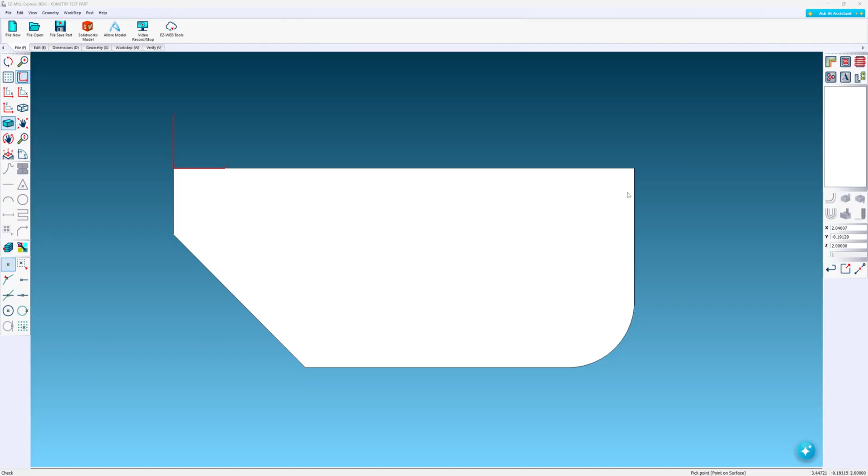This is probably the correct orientation for machining this fillet and the tapered surface here. That is one setup. Then you'd have to close EZ Mill Express and then open a new document and machine the pocket and the countersinks on their separate program. Then you would have to create another setup for countersinking the holes.

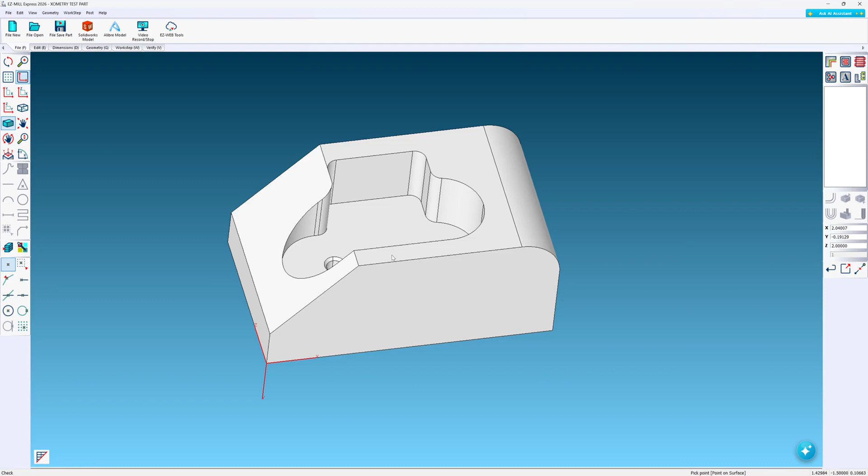So let's stay in this orientation. I could easily move our coordinate system up to the top. I'm going to show you another method. It's called World on Geometry, UCS on Geometry. You can see as I hover my cursor, you have different options. I'm just going to borrow this one for an example.

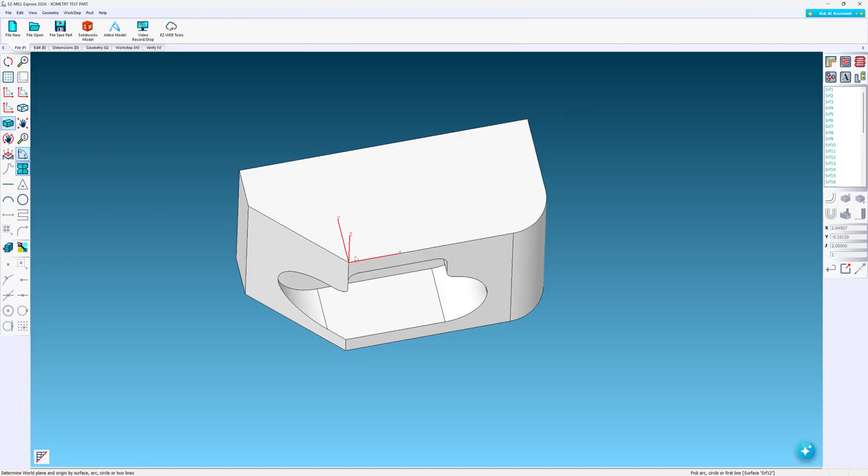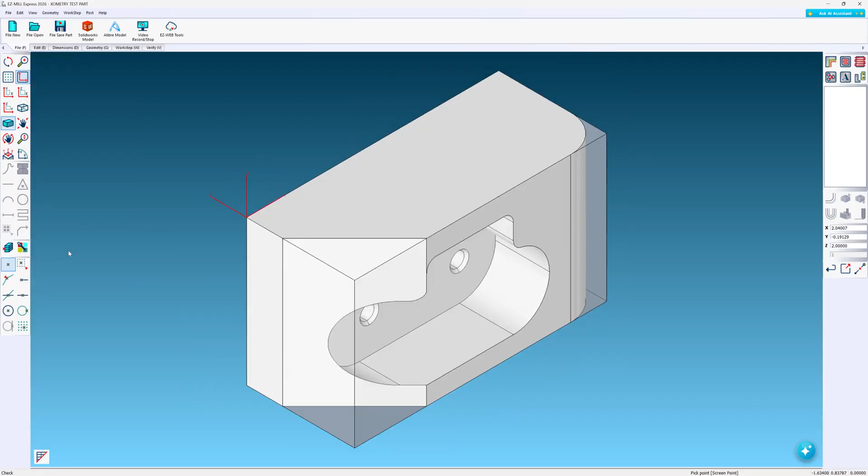Now, if I was pleased with the location, I could just hit original, but I'm going to pick one of the 9 standard locations, top left corner. And we're going to create the stock surface. This is the block size. I'm going to assume that this block has been finished to size. There's our new placement. And here in gray, you can see our stock.

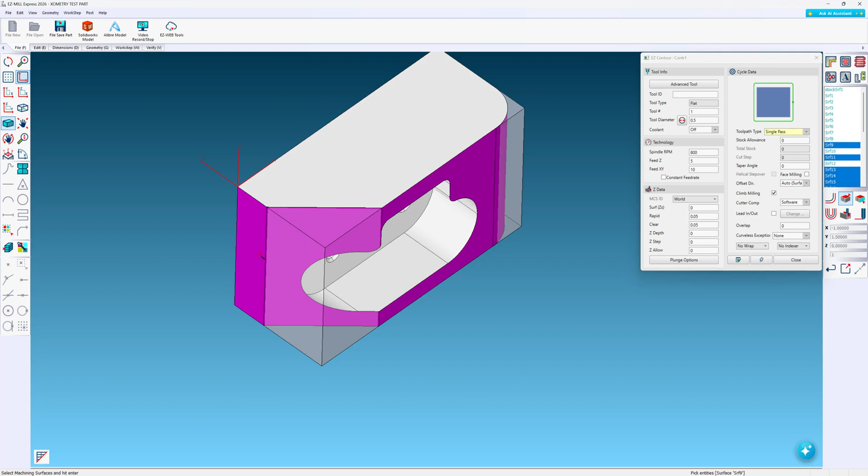We're going to create a contour operation. Smart click is active. I click on one face, it changes all the faces that make up that contour. Now that'd be fine. If the block was oversized, you get a nice cleanup pass. I'm just going to click on the screen to clear my selection. Let's go and hit the shift key. That turns off smart click and I can pick individual faces. I'm going to pick those two there and we'll just verify.

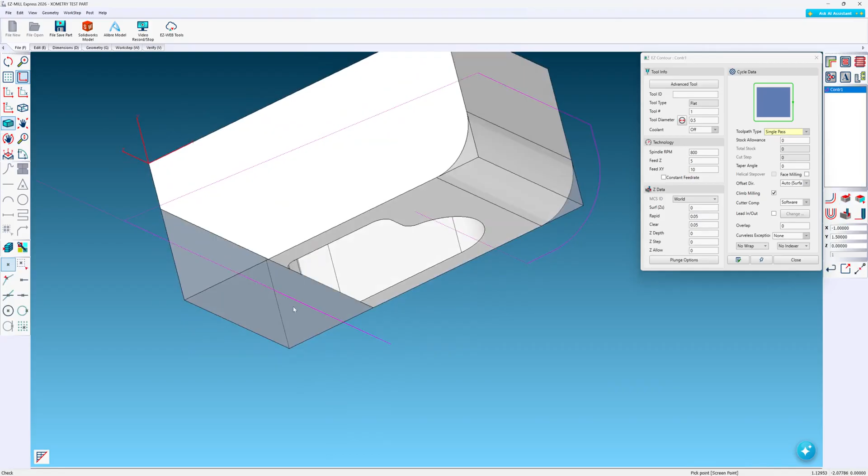So you can see we're getting heavy material here. The tool would leave, let's just demonstrate that. Leaves material. We should be cutting outside and working our way in. So what we'll do there is we'll go to multi-pass. Total stock, I'm going to exaggerate that by 0.7. And a cut step. You can go full depth with your end mill and use a shallow cut step. I'm going to use 50 thousandths.

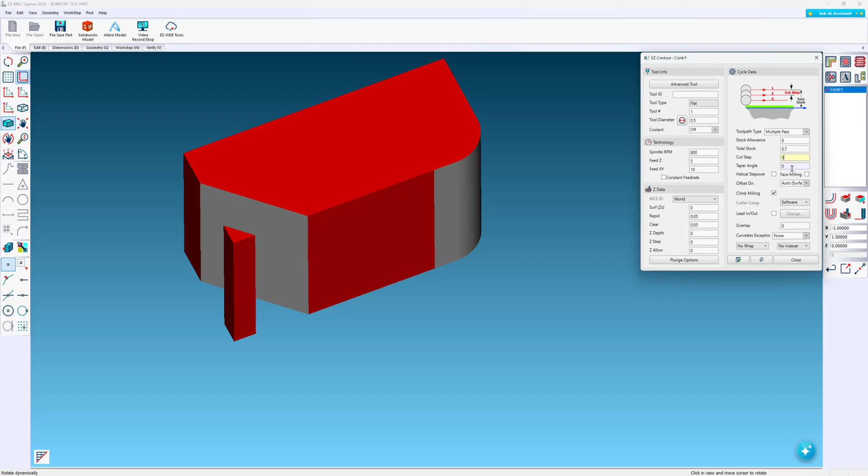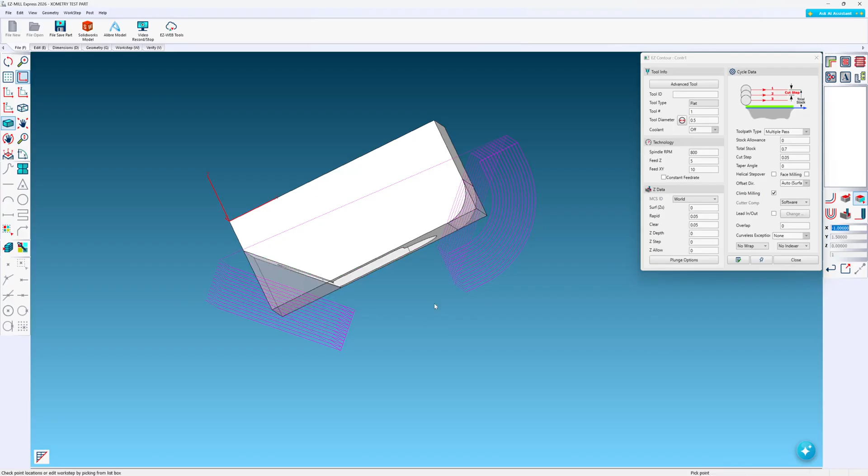Verify that. Now it's not practical. You're going to have a lot of air cutting here. So the way around that, now we created our stock. So I'm just going to include that as a check surface. I'm going to use smart click, turn the shift key. I like to keep it active at all times. And EZCAM trims the tool path.

If you want, you can use helical stepover. So now you're not rapiding out of the part and stepping over to always climb mill or conventional mill. This just zigzags back and forth, cutting up to the wall. Very efficient. Let's verify that.

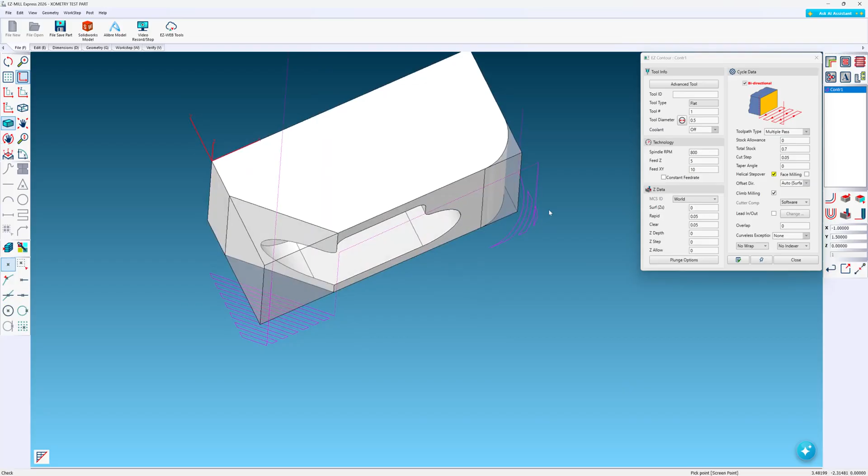So as I mentioned, that's one setup, and you would have to open a new document to machine this side. I'm going to show you how to machine this side in one setup. That'll include the taper angle and the fillet. So I'm going to go back to UCS on geometry. If I hover my cursor, you get the tooltip.

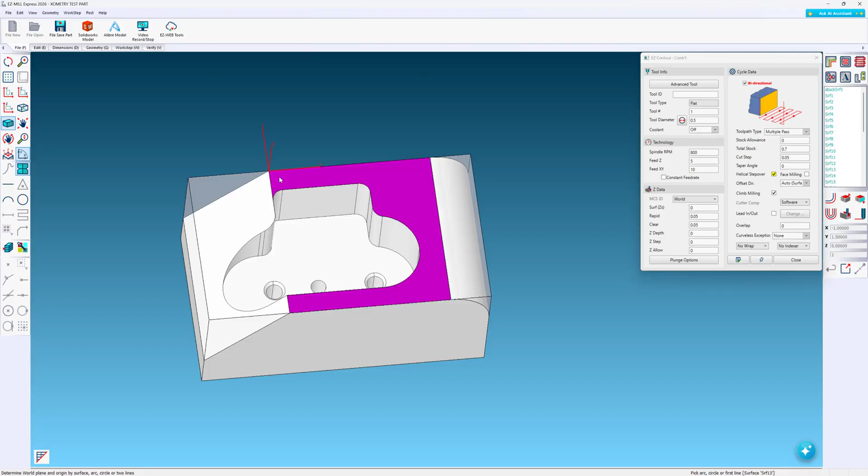And we're going to place it right here. Upper left-hand corner. I'm going to close this. I'm going to actually delete it. If you go to the list box over here on the right, right-click, you can delete. Now I'm going to go to contour.

I'm going to select this tapered face. EZCAM detects that it's a 45-degree angle, does that for me automatically. I can use a chamfer tool and take a couple swipes down until it reaches the bottom. You could use a bullnose tool or a ball nose tool. I'm going to use a 1/4 inch ball nose tool, and if you look at the tool type, it's flat. So we go to advanced tool, just change that over to ball.

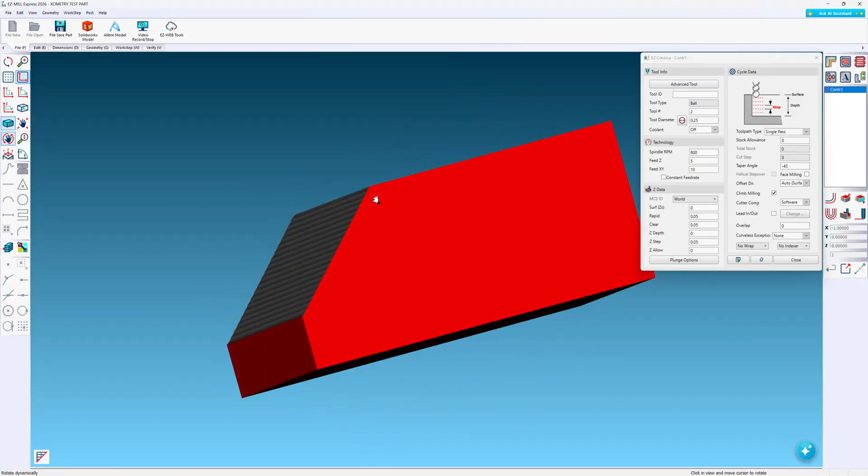Now to get the tool path, EZCAM automatically knows the top and the bottom and any stock from those 2 points. So I'll put in a small step, maybe 50 thousandths. Verify. I'll leave a stock allowance up against the wall. Now I could be using a flat end mill for that as well.

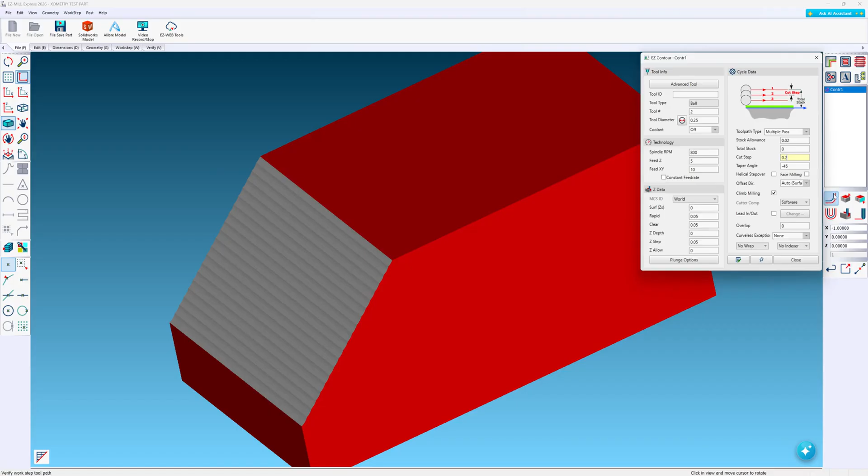I'm going to use multiple pass, total stock. Like I said, it automatically knew from this point to this point that there's stock in between when you're using multiple passes. So I'm going to just add a cut step. 0.2, verify. So now you can see it's machining in layers. 0.2, and it keeps stepping down. So it's coming from outside the part up against the wall.

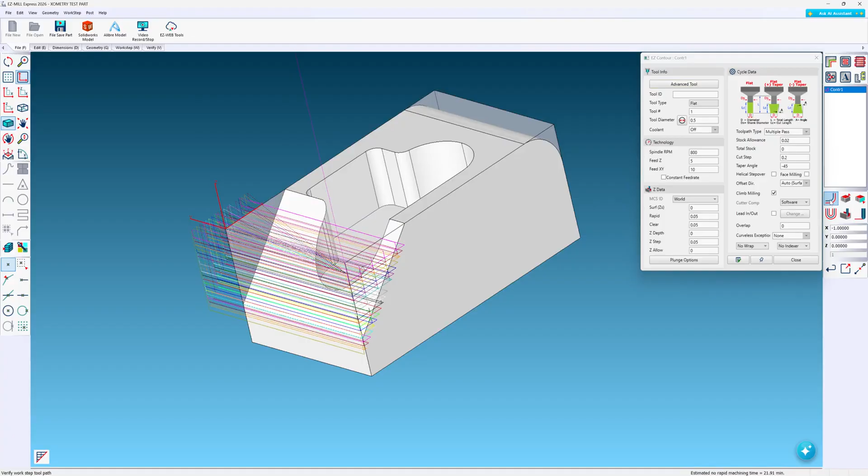Now in a case like that, you're probably going to want to go with a flat end mill. I'll just change this back to the 1/2 inch. Tool number 1. There's our stair step. So you can get away with stronger depth of cut and stronger step over. So now that that's been roughed, I'm going to create a new contour to that face. Now I'll apply our ball end mill.

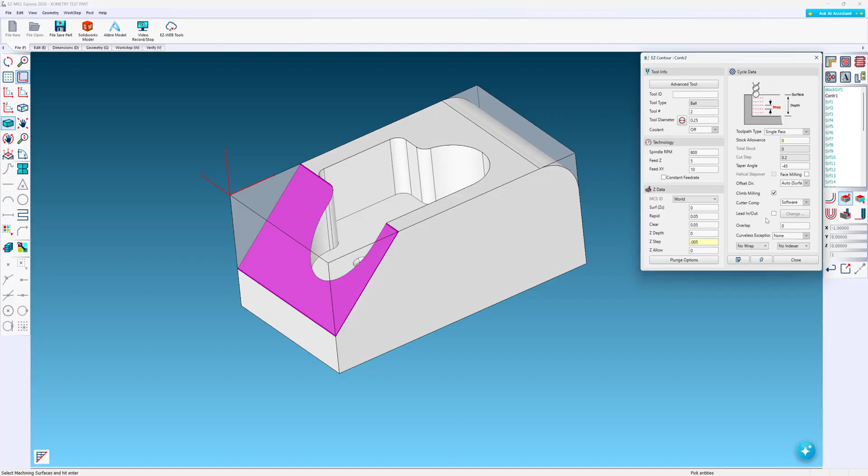Now we don't need multiple passes, and we don't need the stock allowance. We're going to finish to size. Our step will be much smaller; I'll use 5/1000. Now it's wrapping over. It's always going to be climb milling. So what we'll use instead is we'll go to Z Connect. So now it zigzags down to depth.

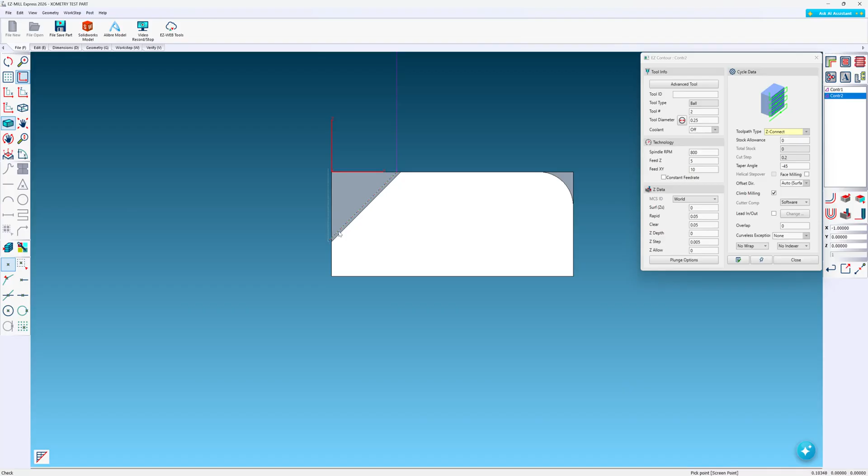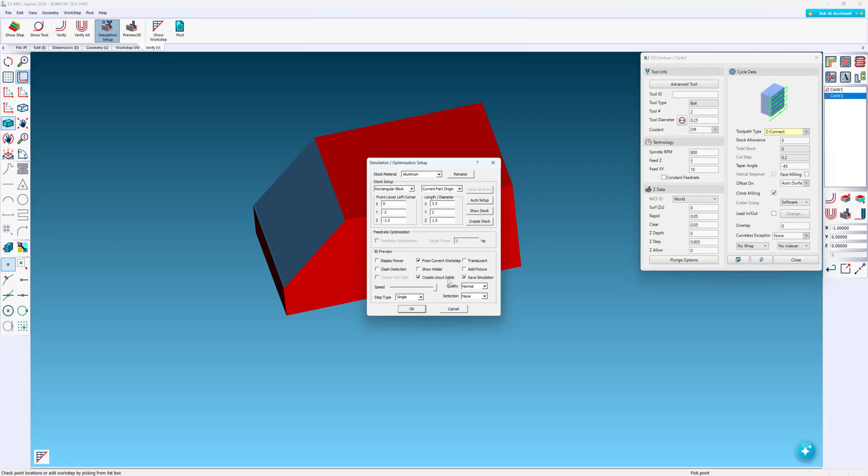Now if I look at a side view, the ball end mill is tangent to this, or actually stops at the tip. There'll be a ball end mill here, so you'll get a cusp at the bottom. Let's take a look at what that looks like. You can see it here. Maybe one of the better options is to go to Verify, Simulation Setup, and I'm going to check Create Uncut Solids. That's Part Compare. So now when I preview it again, you can see that lip we're getting at the bottom.

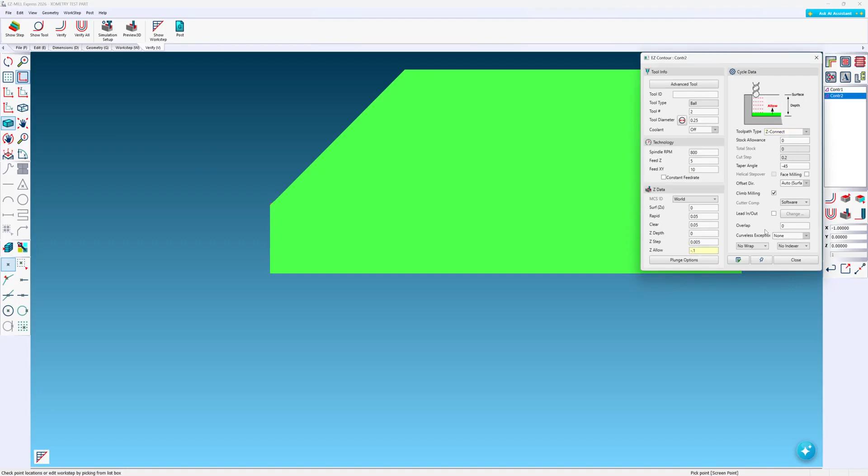No worries, we have a nice feature to take care of that. We just go to the Z allow. Instead of leaving a positive value, we'll go -0.1. Verify. You can see that we get that extended tool path. So at Part Compare, you can see green is cut to size, red is stock. If you had an undercut or a gouge, you would see yellow.

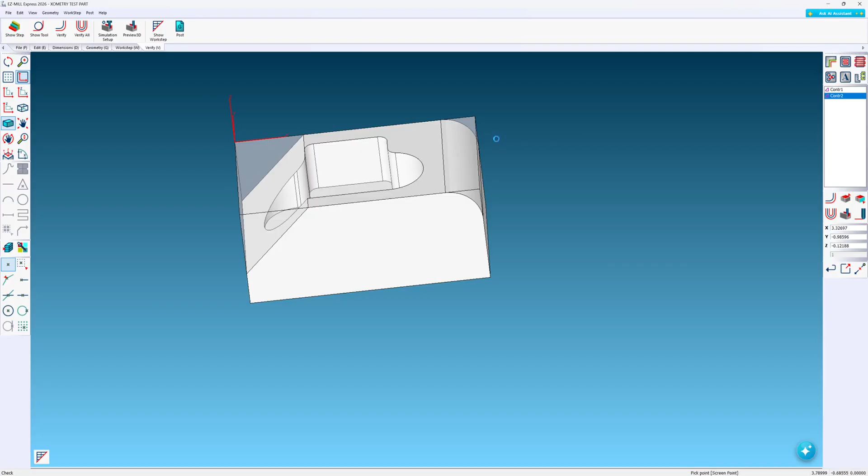Okay, now for the fillet. Now in EZ-MILL and EZ-MILL Pro, there are tools to handle a 3D surface or a fillet like this. I'm going to cheat. I'm going to use the contour, and I'll show you what I'm going to do with that. So by double clicking on that fillet, it gives me a diameter of 1 inch. That fillet is a 1/2 inch radius. So we'll go to contour, pick that face. I'll use the ball end mill. Single pass with a small step.

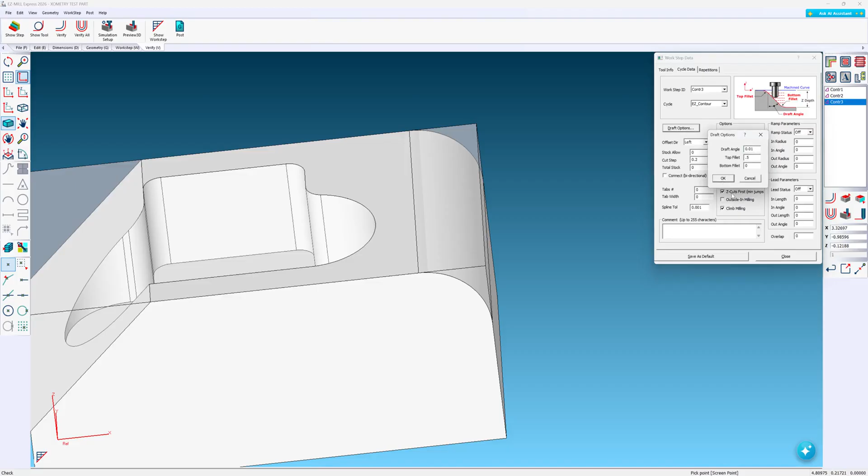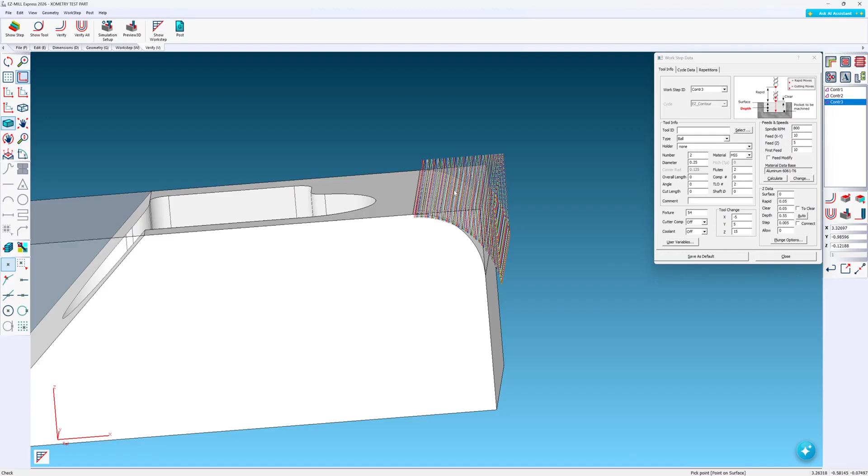Taper angle. There must be something, so I'm going to put in 10/1000. Go behind the scenes. Go to cycle data. Draft options. Top fillet 0.5. Got to give it a depth. There we go. So I just cheated. I made that fillet with a contour operation, so it's not a 3D feature. Preview that. That's perfect. So just enough angle. There has to be an angle associated with the fillet. And that gets you through.

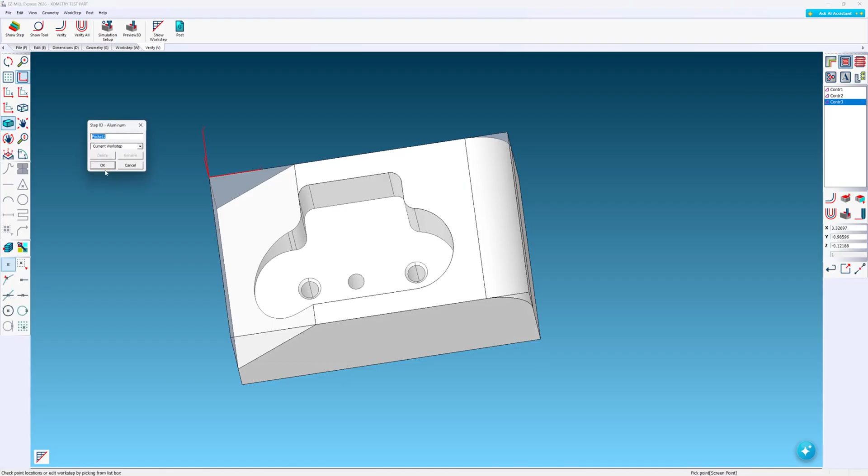Now we're ready for the pocket. Select the bottom face. We'll use a Z step of maybe 250. If I calculate my tool diameter, it's 0.27, so we'll need at least a 1/4 inch to clean up these corners in through here. So that's an automatic calculator. So this will be tool number 3, and that will be a flat end mill.

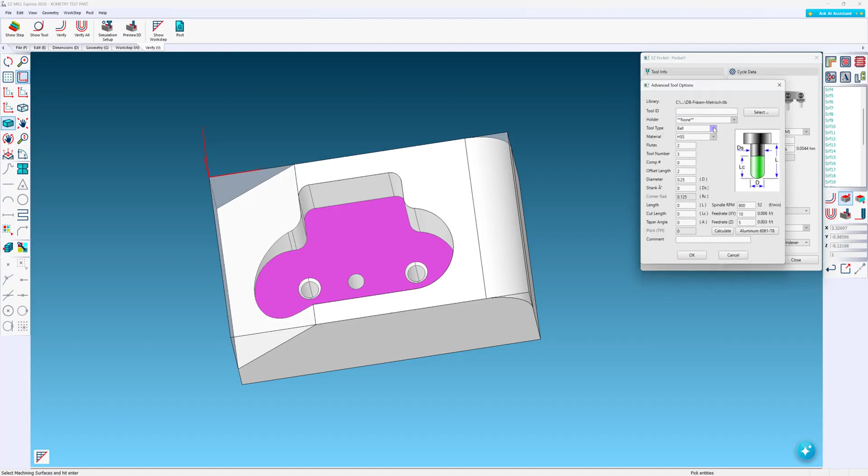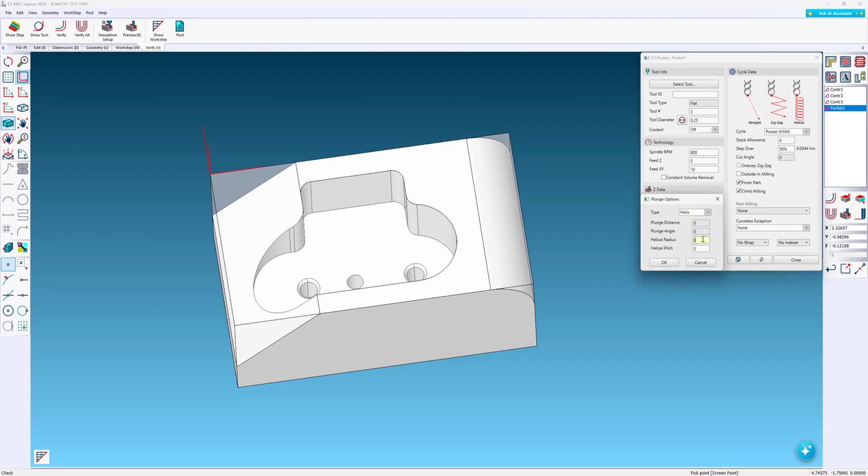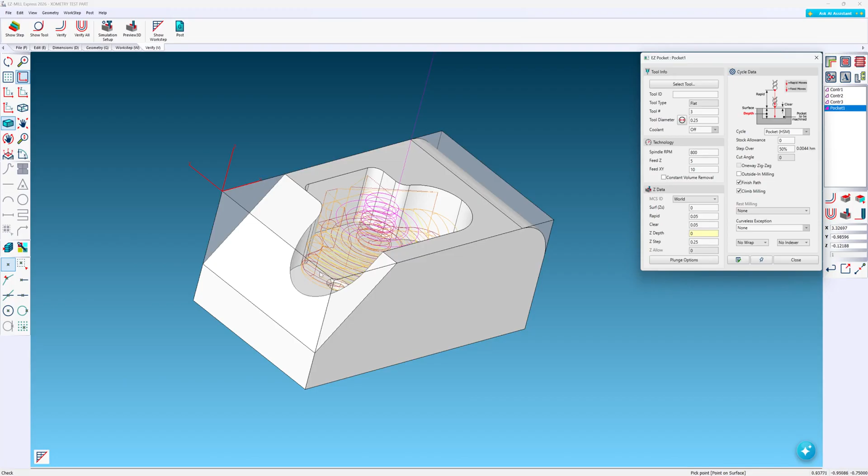Now, what I'm guessing is that the 250 quarter-inch step down is going to be too much to just have the end mill act as a drill. So I'm going to go and add plunge options. We'll go with helix, helical radius, so I'll put in 0.2, and per revolution, let's go down and advance 50 thousandths. So as you can see here, we have our spiral down to depth. We want to take out the depth. That should be 0. Let EZCAM determine the depth based on the surface I selected.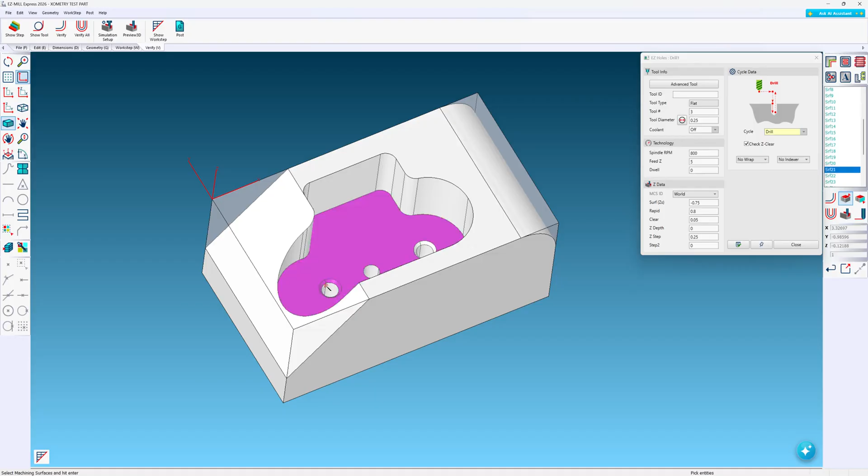Okay, now we need to address our holes. I'm going to select my countersink. I'm going to go to Advanced Tool. I'll use a spot drill. Diameter, let's go with 0.5. Tip angle, 82 degrees. We'll get rid of this step

and verify. Now, what happened here is EZCAM detects that taper angle and gives us the additional depth so that the tip reaches the bottom of this to generate this diameter here. The negative 0.75, if that was 0, the surface where we touched off our tools, it would feed from that point until it reached the bottom. That's a lot of air. So EZCAM detected that that pocket is where this hole should start. Let's take a look at our preview. Perfect.

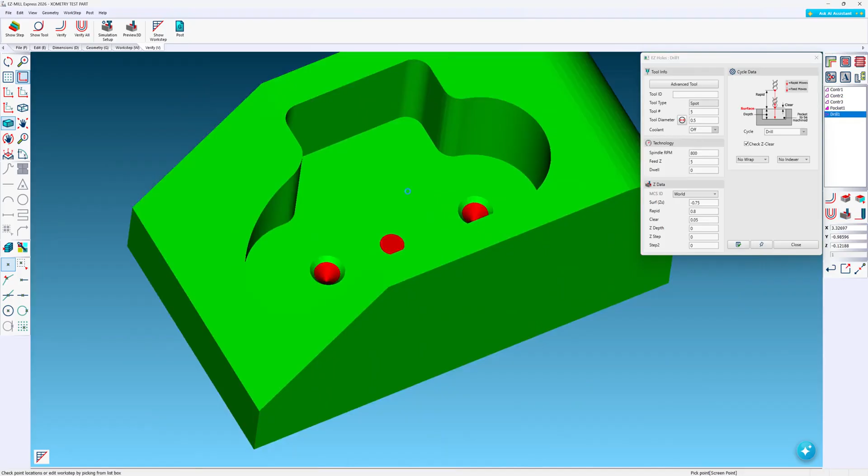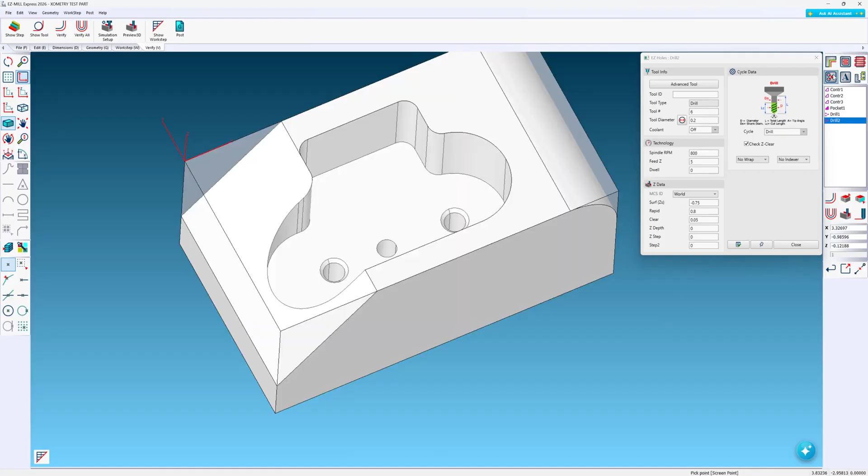Now all we need to do is drill the other 2 holes. What I mean by that is if I select one hole, EZCAM finds all the holes of the same diameter. So we select 1, 2. This will be tool number 6. Calculate my tool diameter. I'm going to change over to drill. Tip angle of 118 degrees. Verify. Preview. Now for our one last hole. Tool 7. Verify. Preview.

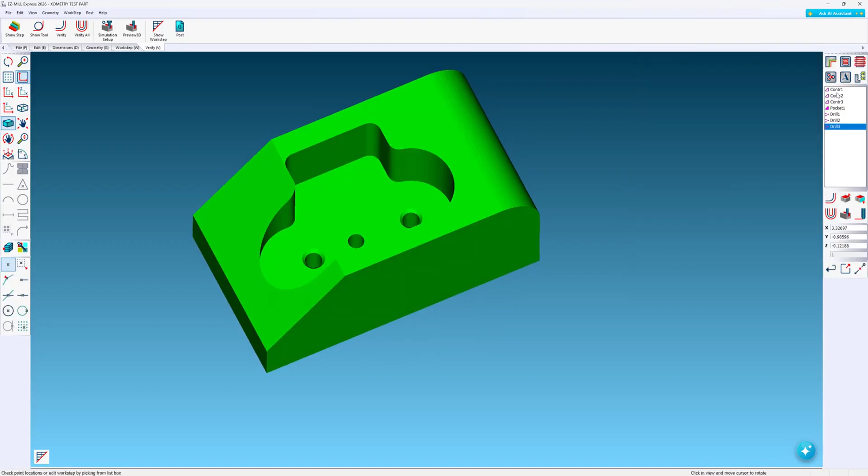All right, let me go over a couple of features with you. If you want to change the order of operations, let's double click. There's our taper angle. There's our fillet right here. Let's say you want to machine the fillet first. So you highlight contour 3. Use the left arrow key to move the operation up. Use the right to move it down. So now that becomes the first thing that gets machined.

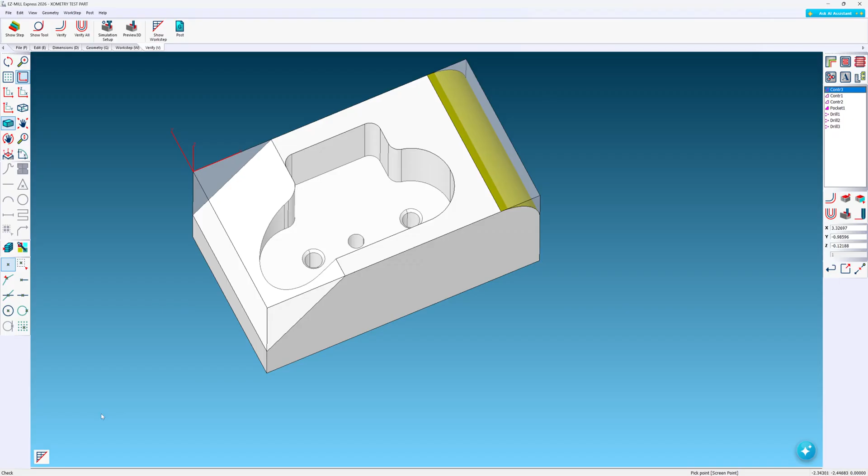Now if I go to the lower left-hand corner, there's a button here for the work step manager. Slide this up. There's our contour 3 that we moved to the top. You can also right click and cut and copy. You can copy work steps. You can delete them. You can sort by tool number. So let's check our tool numbers.

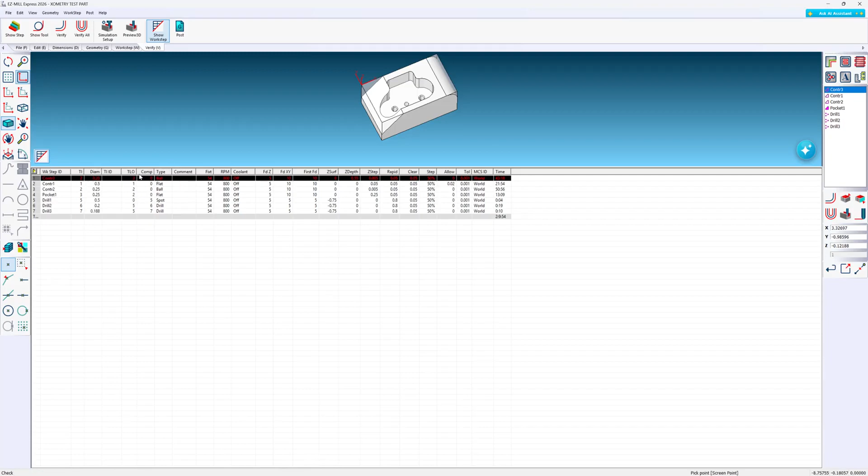So we have tool, bring over the diameter so you can click and drag. So tool 2 is a 1/4 inch, and that's a ball. We have a 1/4 inch. That's tool 2. This is a flat end mill, so that's tool 3. Tool 1's our 1/2 inch. So this is a way of changing your tool numbers. So if I wanted to change this to tool 4, that gets updated in all of your operations.

So anything you adjust here, you can change, like your max RPM 4,000. Let's just click on RPM. Let's highlight this, right click, fill down. So now all of them are 4,000 RPM, maxed out my machine's RPM, and change maybe your feed rates.

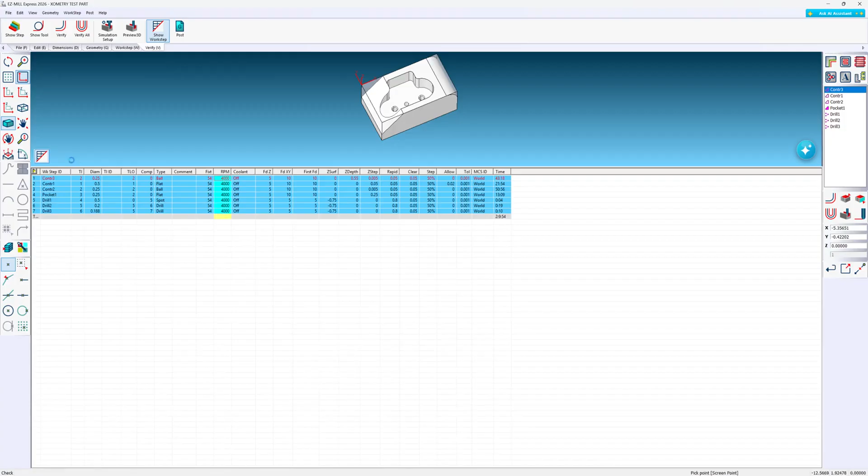So, okay, well, that's the lesson I have for you today. You're ready to post process, and happy machining.